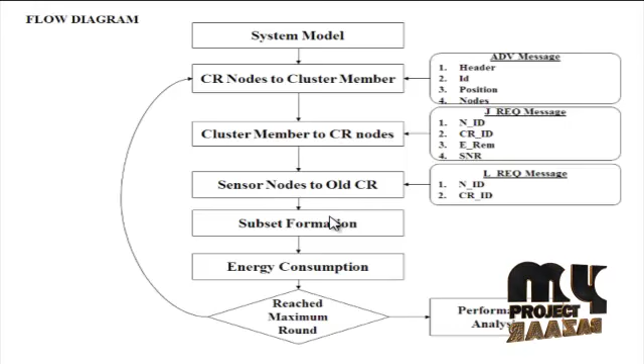In this request, a leave request message is sent, which contains the node ID and CR ID, and is sent to the old CR. Next, in the subset formation stage, the cluster is divided into one or more distinct subsets, so that only one subset of nodes is activated instead of activating all subsets, in order to reduce energy consumption.

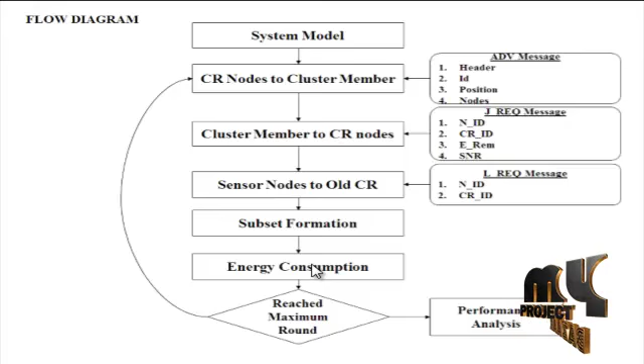Finally, the energy is estimated. Total energy consumed by the sensor node can be decomposed into the energy setup stage, the energy sensing stage, and finally the energy sending stage. Energy consumed for the setup stage consists of the energy consumed in cluster formation, updating, and subset formation.

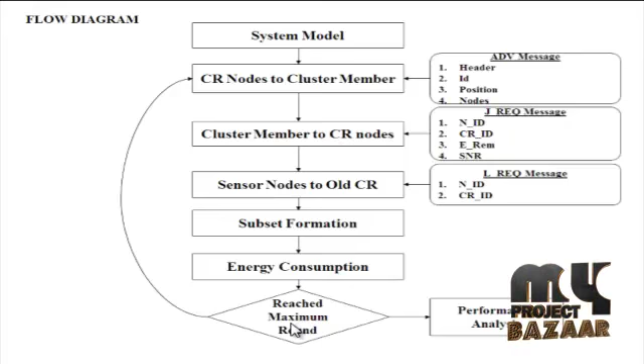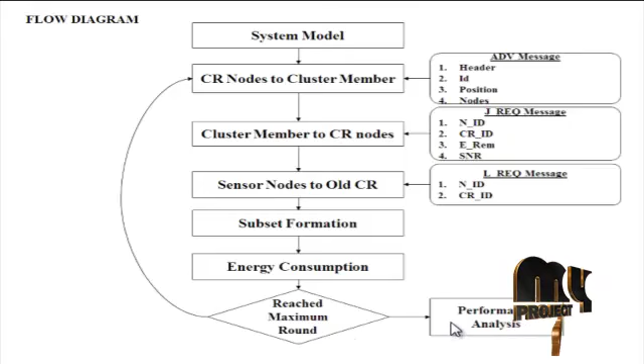Finally, if the maximum round has been reached, the process will be finalized. Otherwise, the process continues with the CR nodes to cluster member stage. Finally, the performance is analyzed: estimation of end-to-end delay, consumed energy, mean square error, and probability of detection.

Let me discuss the run procedure for our process. Select the main.m file in the current folder and run it to execute this process. Here we perform cognitive radio network operation with the energy efficient clustering protocol. We deploy the CR users and normal sensor users, and analyze the energy consumption for our proposed system. This will take some time to execute because of the maximum number of rounds.

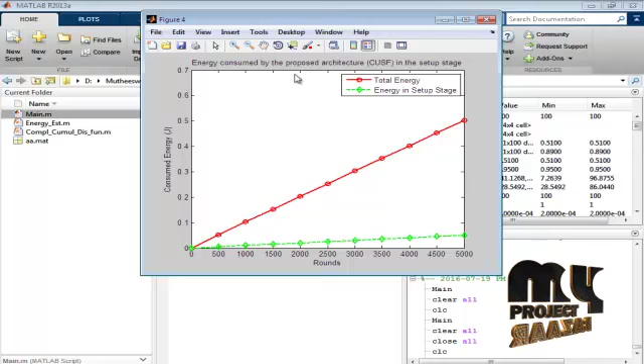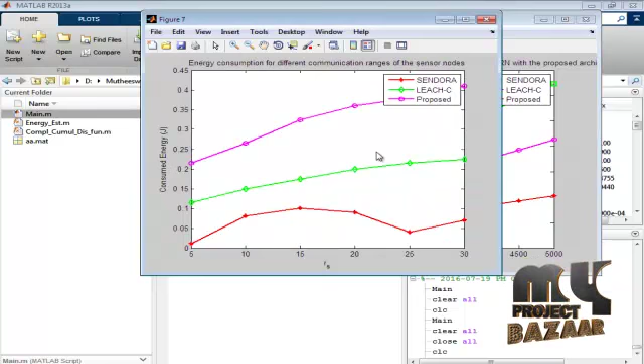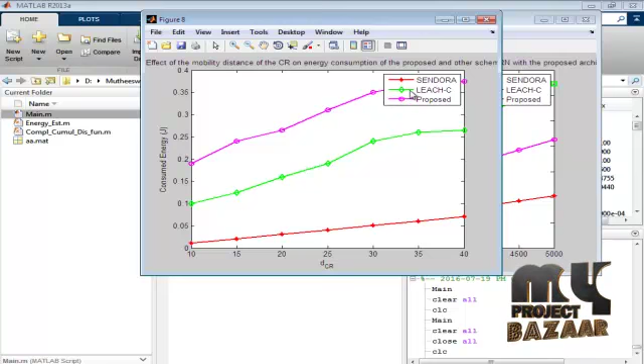This is the energy consumption for different communication ranges of the sensor nodes, by varying the communication range. And this is the energy versus mobility distance of the CR. By varying the mobility distance of the CR, we analyze the consumed energy with the help of existing and our proposed systems.